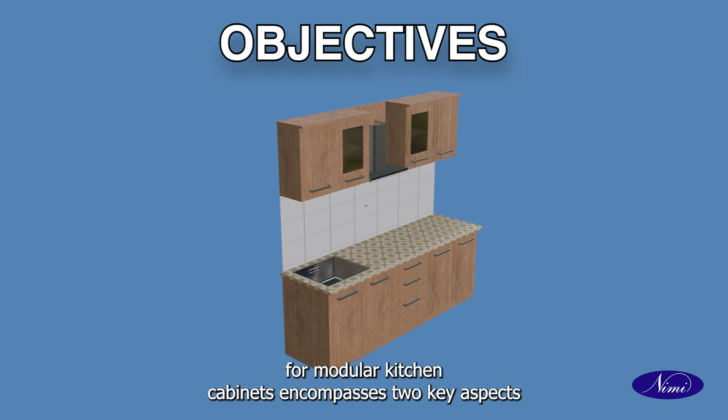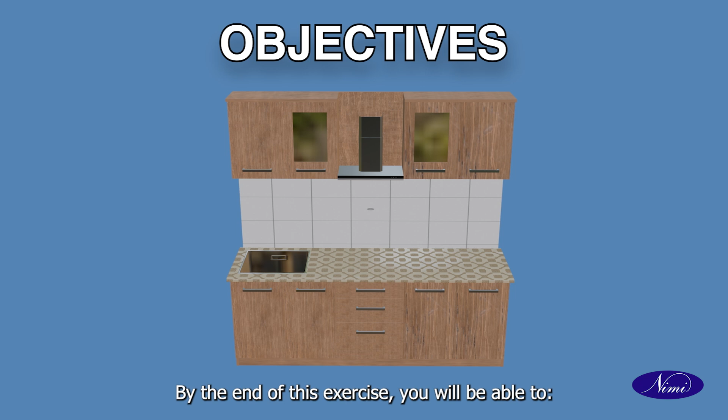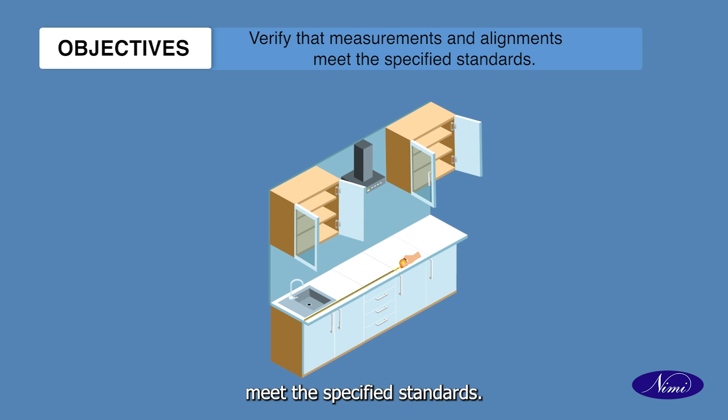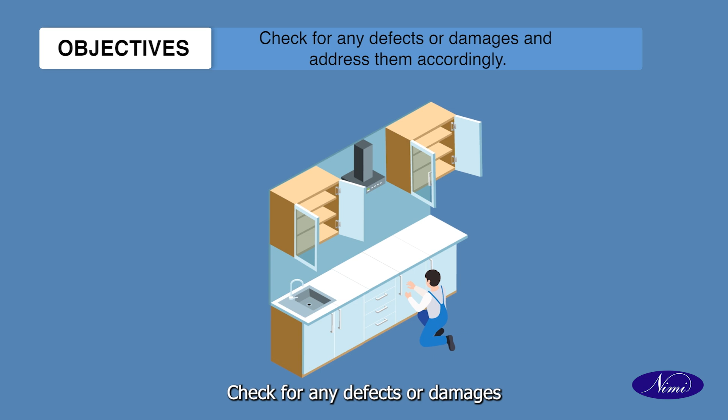Objectives. The objective of the quality control process for modular kitchen cabinets encompasses two key aspects: checking for accuracy and ensuring a refined finishing. By the end of this exercise, you will be able to ensure all components of the modular kitchen cabinet are correctly assembled, verify that measurements and alignments meet the specified standards, confirm the proper placement of shelves, drawers, and other elements, check for any defects or damages and address them accordingly.

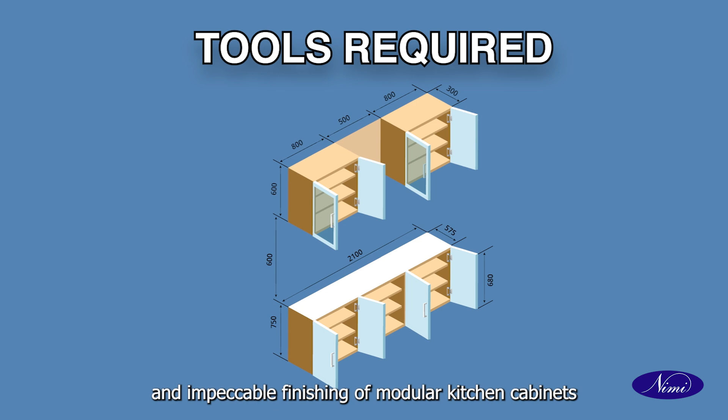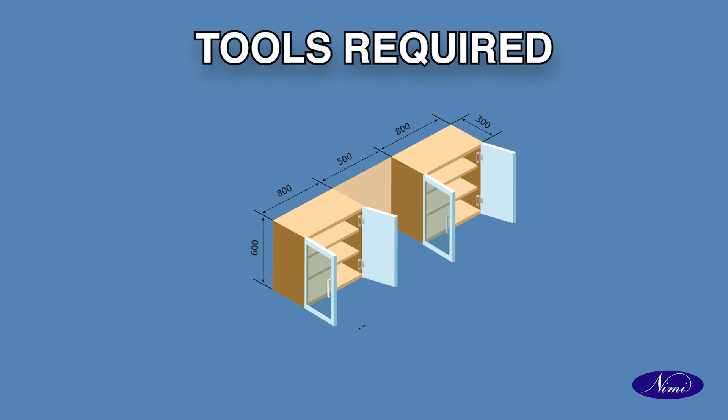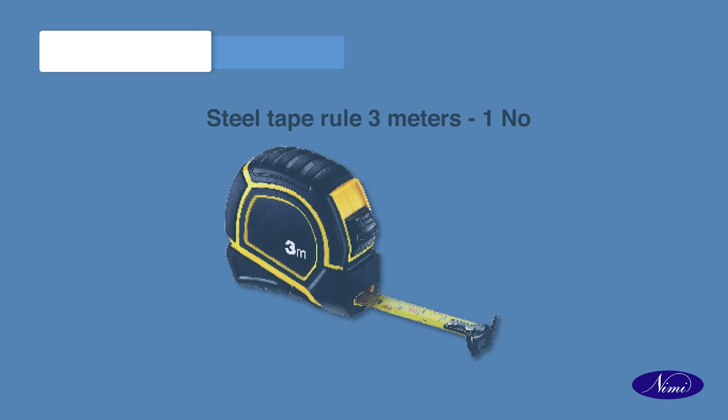Ensuring the accuracy and impeccable finishing of modular kitchen cabinets requires a set of specialized tools and equipment. Precision tools such as tape measures, levels, and angle finders are essential for verifying the alignment and dimensions during the accuracy check. Let us now take a look at the tools and equipment required for checking the accuracy and finishing of modular kitchen cabinets. Steel tape rule 3 meters, 1 number.

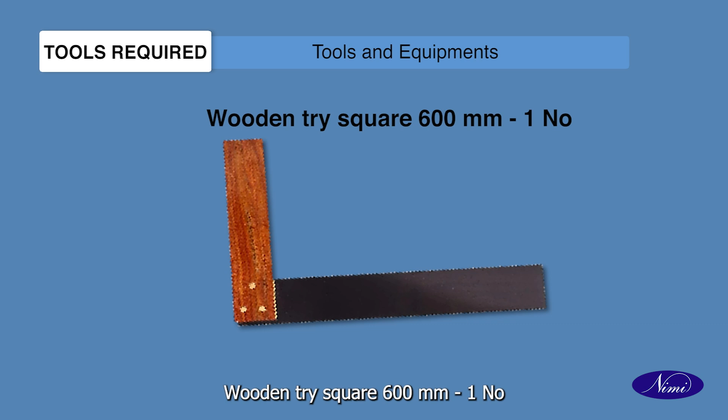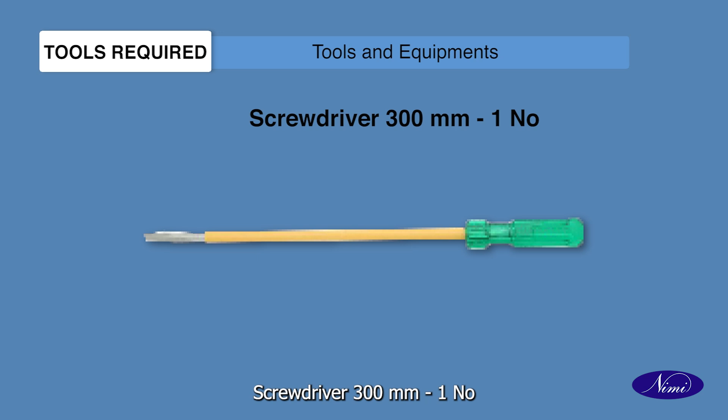Tri-square 200 mm, 1 number. Wooden tri-square 600 mm, 1 number. Firmer chisel 30-50 mm, each 1 number. Marking gauge 1 number. Claw hammer 1 number. Ball peen hammer 1 number. Screwdriver 300 mm, 1 number. Drilling machine. Portable power rotary hammer drill machine and bit. Portable electric drill light duty and bit. Portable electric screwdriver and bit.

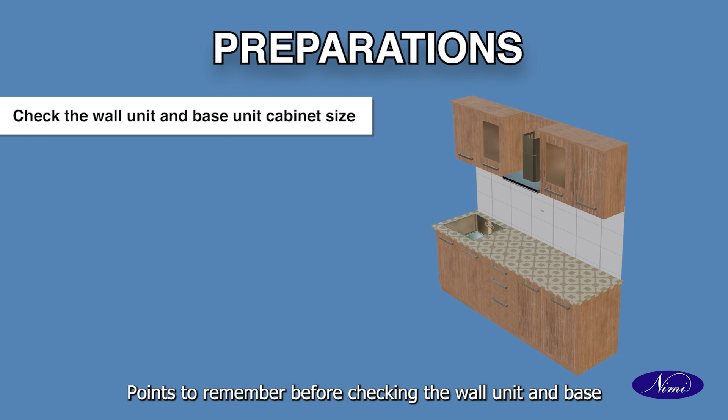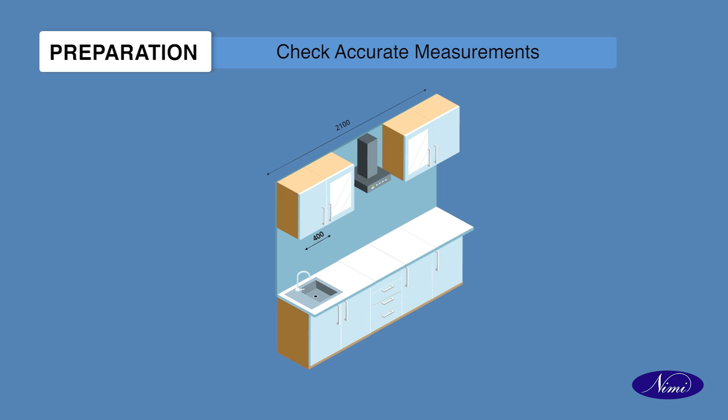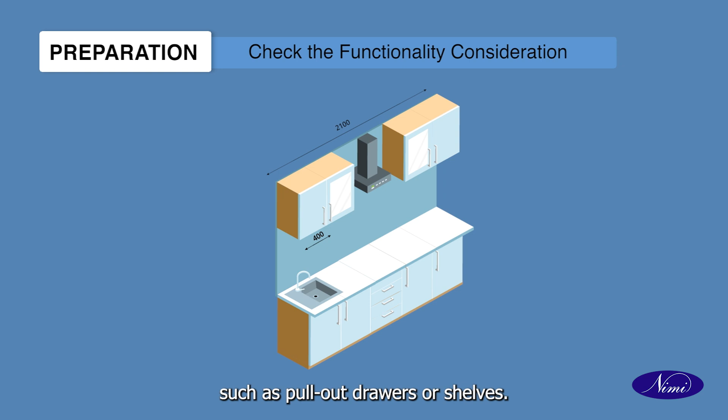Now let us see the preparations for checking for accuracy and finishing of the modular kitchen cabinet. Points to remember before checking the wall unit and base unit of kitchen cabinet size. Check accurate measurements. Take precise measurement of the available space including width, height and depth for both wall and base units. Check the functionality consideration. Determine the intended use of the cabinets and any specific features required such as pull-out drawers or shelves.

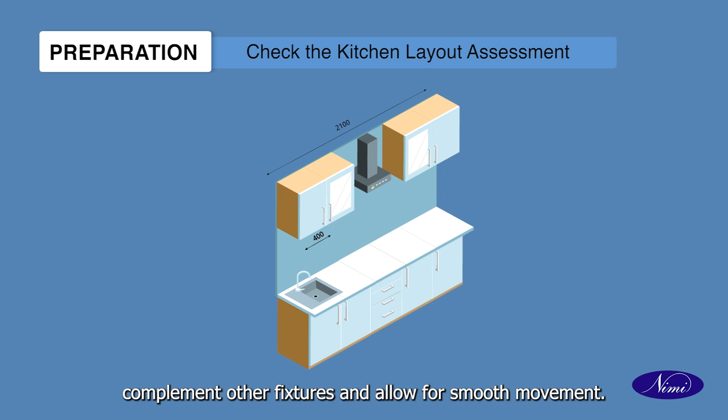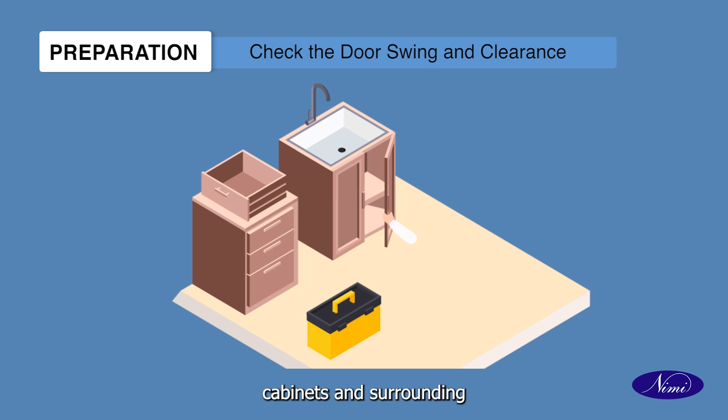Check the kitchen layout assessment. Evaluate the overall kitchen layout to ensure that the cabinet sizes complement other fixtures and allow for smooth movement. Check the door swing and clearance. Account for door swing space and leave adequate clearance between cabinets and surrounding elements for easy access. Check the customization options. Explore customization possibilities for tailored solutions that fit your space and needs perfectly.

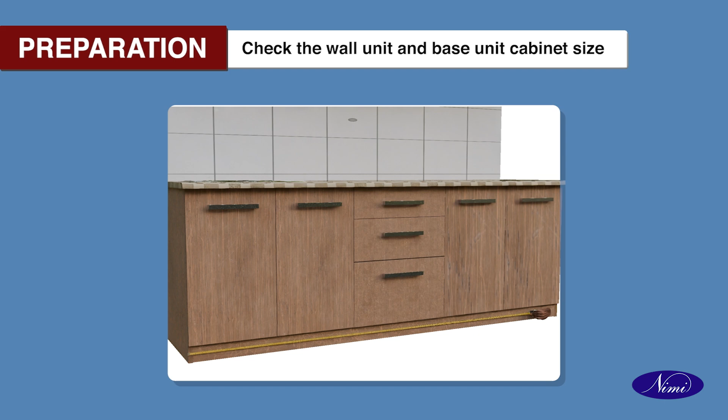Check the wall unit and base unit cabinet size. Check the length, width and height of the cabinet wall unit. Check the door alignment of the wall unit cabinet. Check the door closing gap in wall unit. Check once again the fitting glass in door. Check the magnetic catch in wall unit. Check the length, width and height of the cabinet base unit. Check the door closing gap in base unit. Check the sliding rail movement in the basket. Check the magnetic catch in base unit.

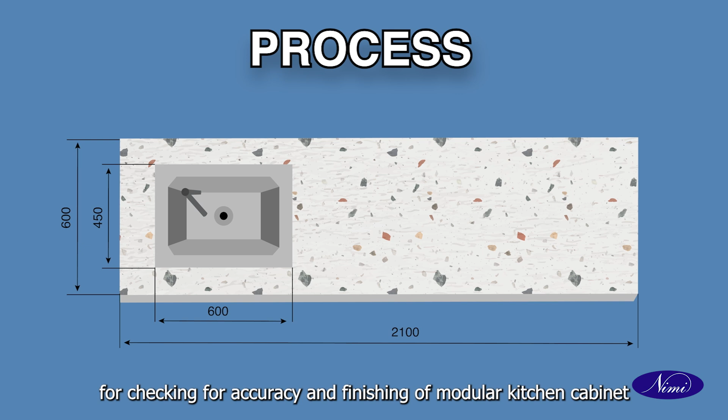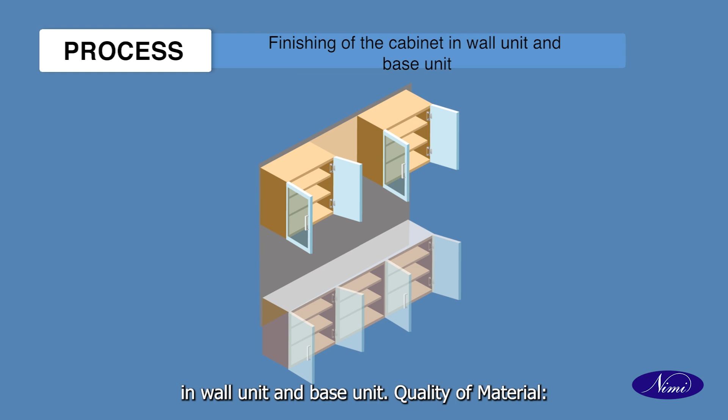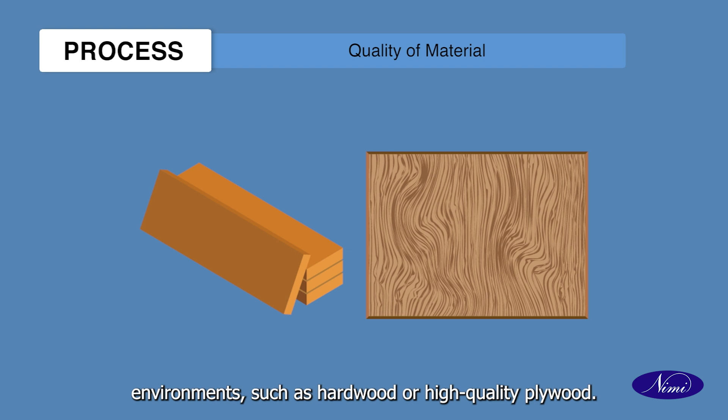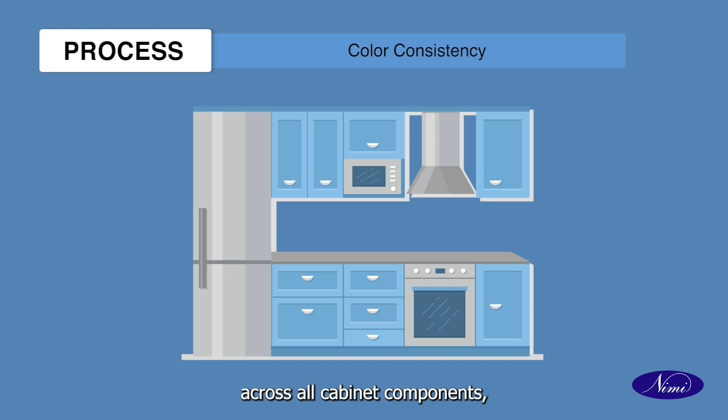Now let us see the preparations for checking for accuracy and finishing of modular kitchen cabinet. Points to remember before checking the finish of the kitchen cabinet in wall unit and base unit. Quality of material. Ensure the cabinets are made from durable material suitable for kitchen environments such as hardwood or high quality plywood. Finish options. Consider various finish options including paint, stain or laminate and choose one that complements the overall kitchen design. Color consistency. Check for color consistency across all cabinet components including doors, frames and panels to maintain a cohesive look.

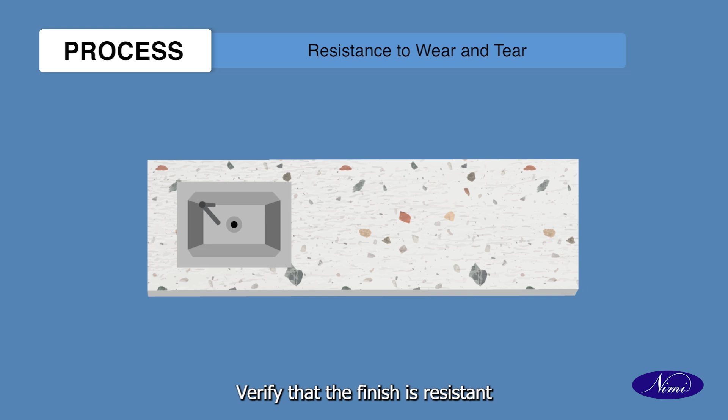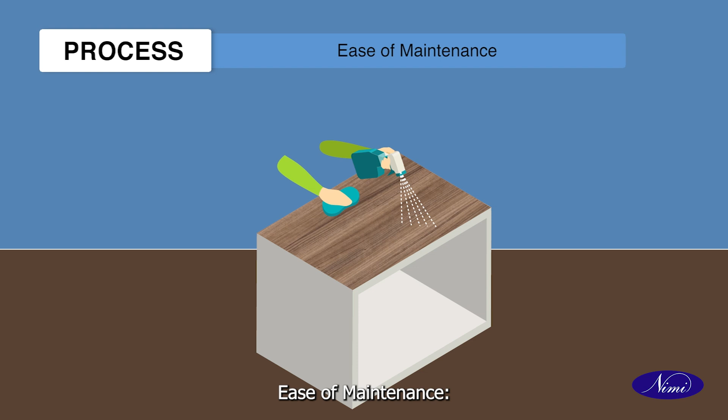Smoothness and texture. Inspect the surface for smoothness and texture to ensure a professional and visually appealing finish. Resistance to wear and tear. Verify that the finish is resistant to scratches, stains and moisture, as kitchens are prone to spills and frequent use. Ease of maintenance. Choose a finish that is easy to clean and maintain, allowing for long-term durability and aesthetic appeal.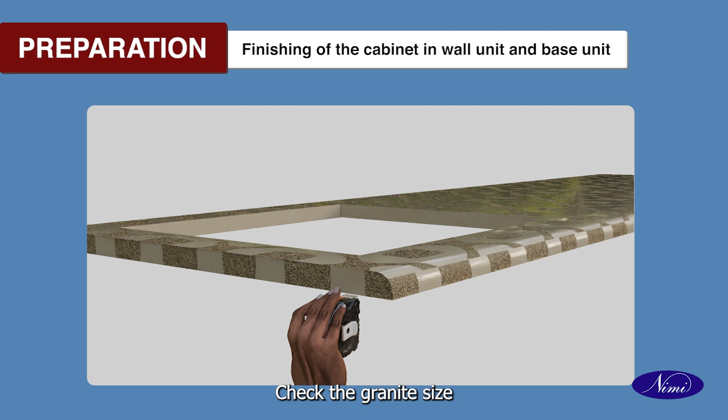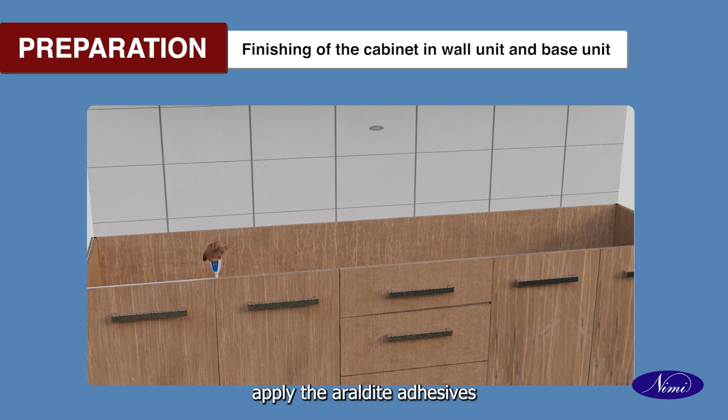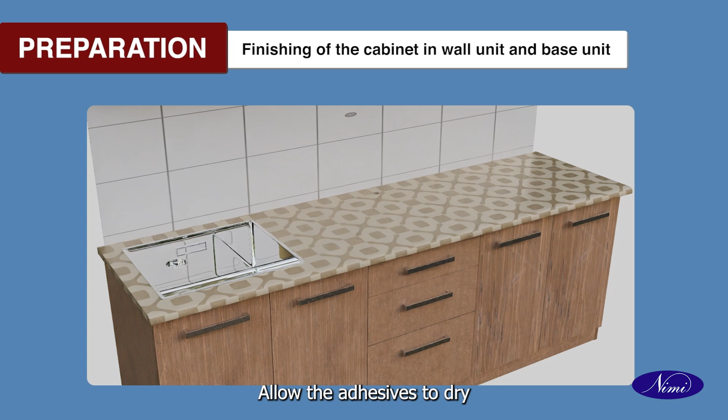Finishing of the cabinet in wall unit and base unit. Check the granite size. Place the granite square on the base unit top and check granite sink cutting and the hole for gas tube insertion properly in position. Remove granite. Apply the araldite adhesive on top of base unit uniformly. Place the granite on top properly. Allow the adhesive to dry. Clean the granite with damp cloth and finish it.

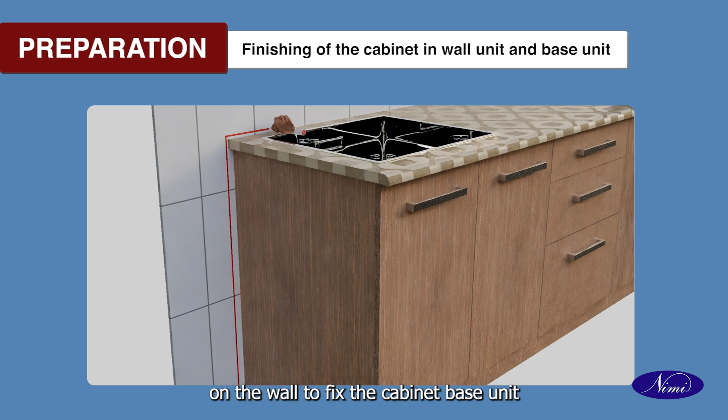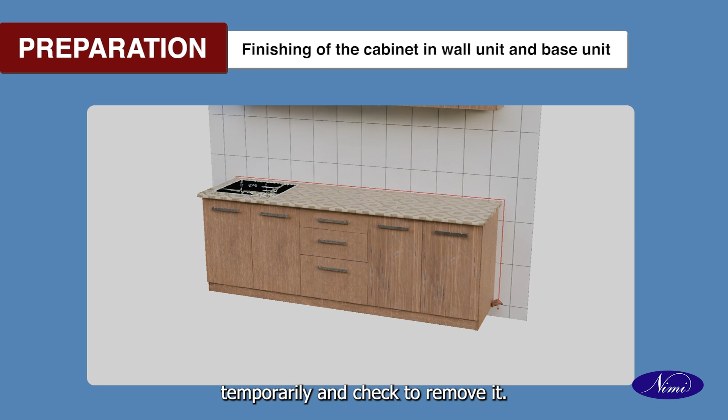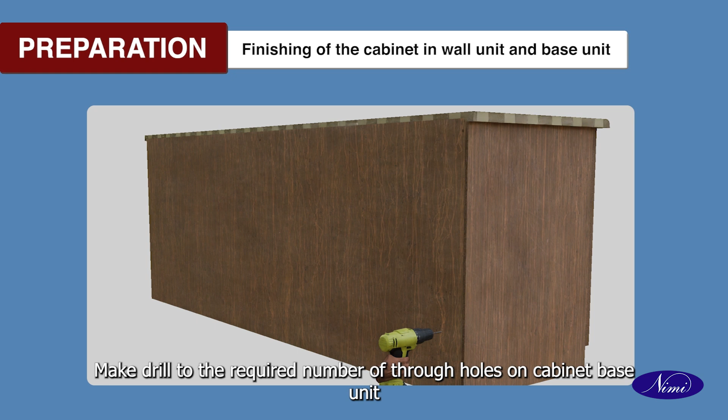Mark the borders of the cabinet on the wall to fix the cabinet base unit considering level, center, etc. Keep the cabinet base unit on the wall temporarily and check, then remove it. Select the size of the drill bit, fix it in the drilling machine and keep it ready to drill. Drill the required number of through holes on the cabinet base unit backside to mount it on the wall. Place the drilled cabinet base unit in position as marked on the wall and mark the hole centers and remove it.

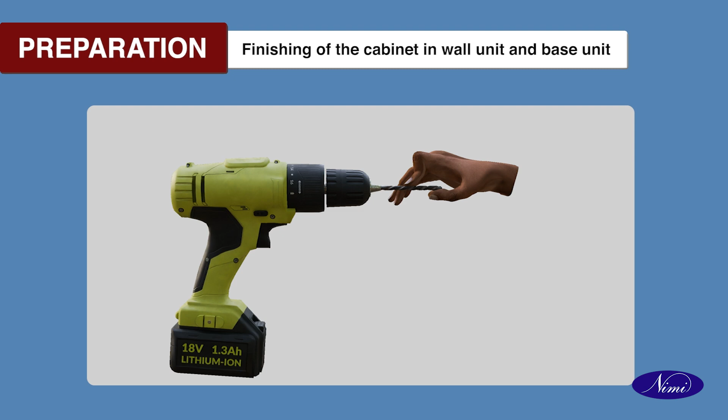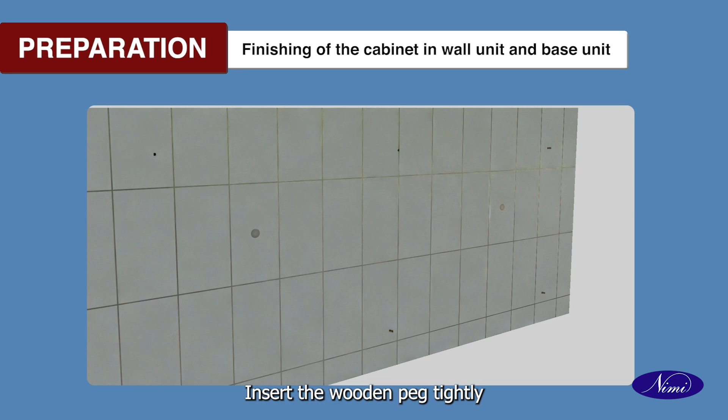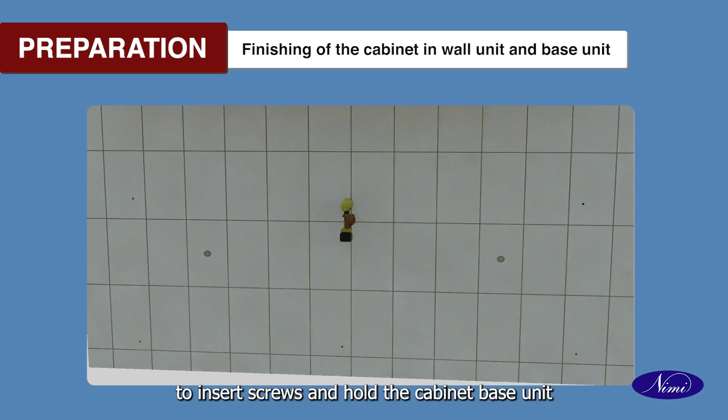Select the hammer drill bit and fit it into the portable power hammer drilling machine. Drill the holes to required depth on marked centers on wall. Prepare the wooden peg to fix the cabinet in the wall as per the requirement. Insert the wooden peg tightly inside the drill holes with ball peen hammer. Remove the projected pegs, drill pilot holes to insert screws and hold the cabinet base unit.

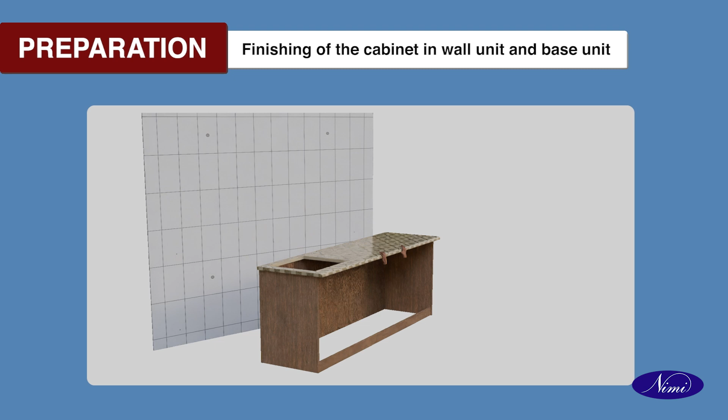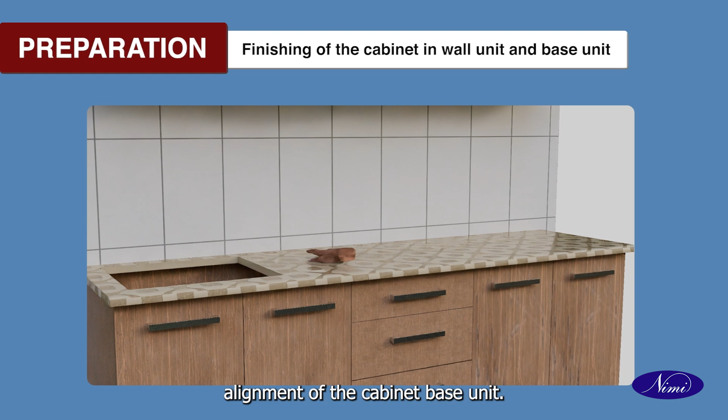Lay the cabinet base unit and place it on the wall and mark the position with respect to level, hole centers. Insert the screws, tighten and hold the cabinet base unit in place with the help of a power screwdriver at a lower speed to screw it. Check the alignment of the cabinet base unit.

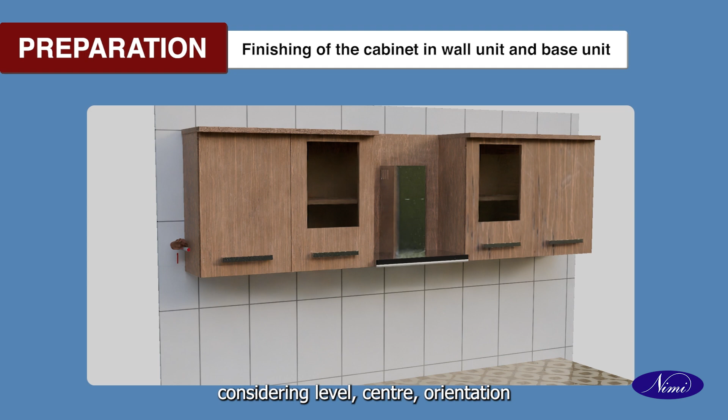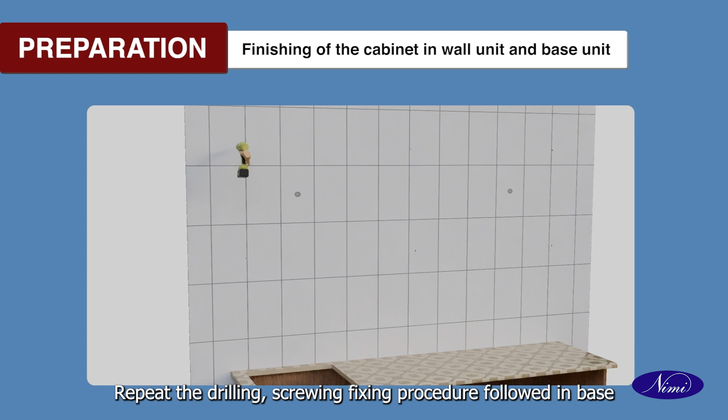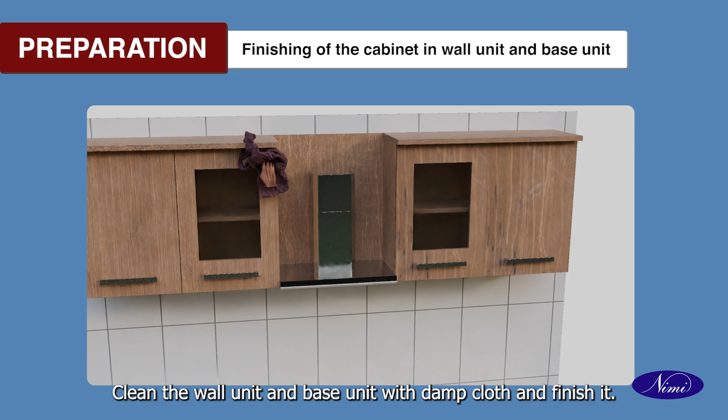Place the cabinet wall unit 600 mm above the base unit granite top considering level, center, orientation with respect to base unit, etc. Mark the cabinet borders on the wall to fix the cabinet and remove it. Repeat the drilling, screwing, fixing procedure followed in the base unit fixing. Finally, check for firmness. Clean the wall unit and base unit with damp cloth and finish it.

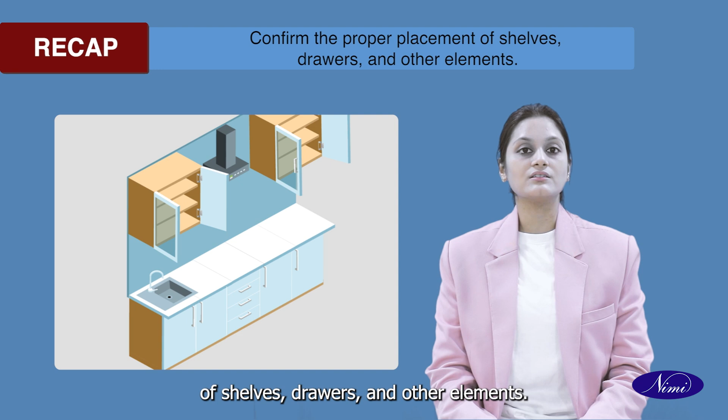In this topic, we have learned to ensure all components of the modular kitchen cabinet are correctly assembled, verify that measurements and alignments meet the specified standards, confirm the proper placement of shelves, drawers, and other elements, and check for any defects or damages and address them accordingly. I hope you all understood the process of checking for accuracy and finishing of modular kitchen cabinet.